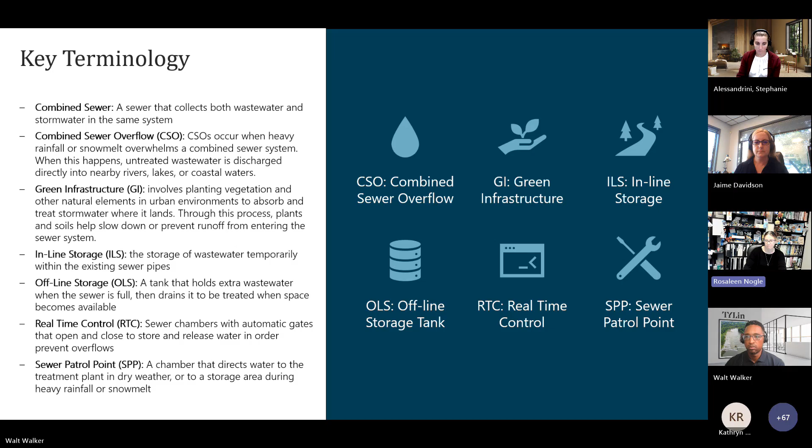We are funding this $1 billion through a mix of federal and state funding administered through New York State EFC and DEC, particularly using grants, 0 to low interest loans. We are funding the green infrastructure, the first round at least, through an environmental impact bond. And then we are also relying on our existing capital budget.

And so we will be funding through these mechanisms ongoing and future work at our treatment facility, offline storage, real-time control, green infrastructure, and then also pump station and other upgrades.

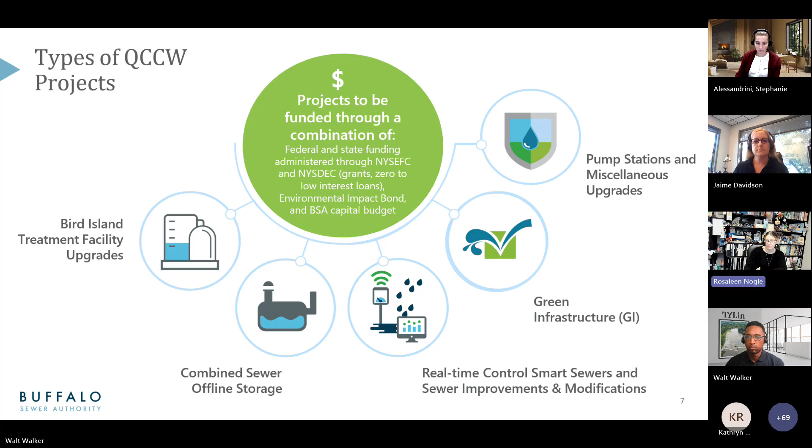We occasionally do get phone calls from folks asking about where can they find out what's upcoming. And you all are on this meeting to learn about what's all upcoming. So please go to buffalosewer.org. How can we help? Consultant, contractor, supplier opportunities is the best place to see what's upcoming and get real updates on where things are at and what is going out to bid or what we are soliciting proposals and qualifications for.

And on there, we have added a spreadsheet of forecast upcoming bids, RFPs, and RFQs. If you see that there's especially an RFQ or RFP that has not yet been posted, but seems to be that it should be out, please go ahead and reach out regarding that. But we are trying to keep this up to date so that everyone knows where things are at and what to be on the lookout for.

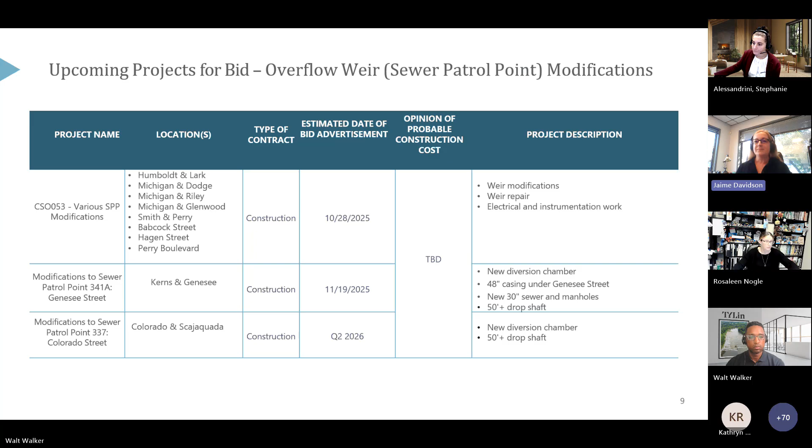Next slide. Okay, to start with the various SPP modifications, the very first site that is included is SPP 336B, and this is located within Humboldt Parkway, so that will be a challenge just working in that busy roadway. But this project includes a weir modification, basically adding a labyrinth weir as shown on the right in that detail to the existing SPP structure. This entire contract is coming out to bid at the end of October, and we are targeting an opening date before Thanksgiving on November 20th.

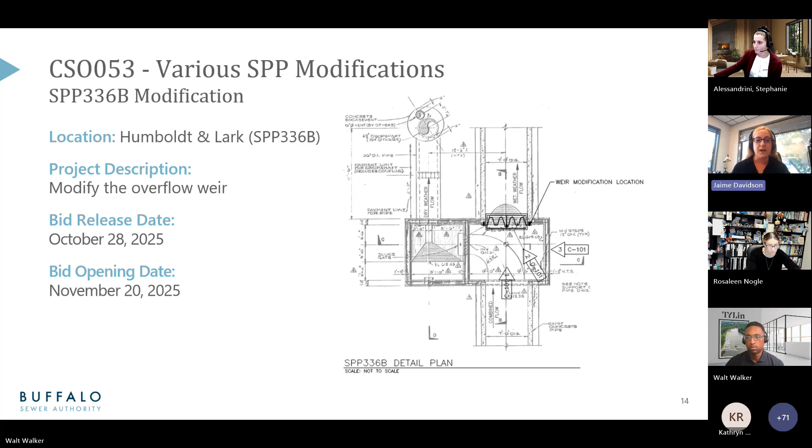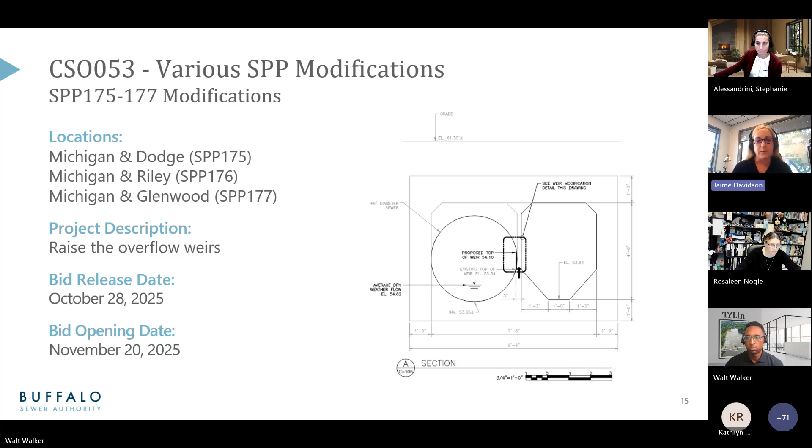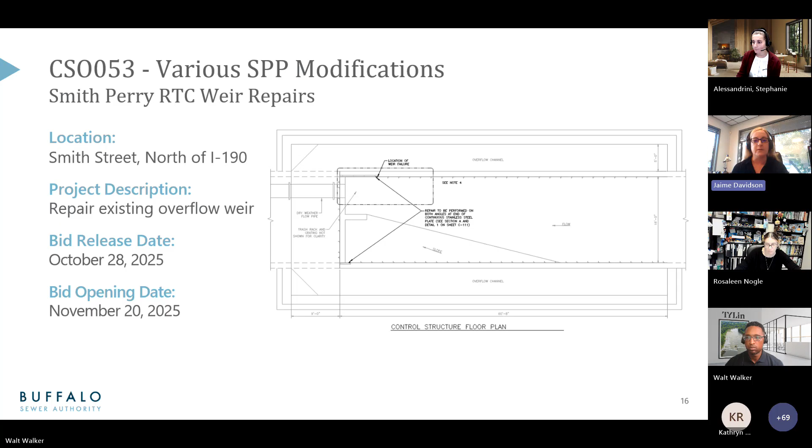The second grouping of projects in this contract will be 3 SPP weir raisings. They are all located on Michigan Avenue at subsequent side streets, so at Dodge, Riley, and Glenwood. And these ones include adding a weir, essentially a weir plate to raise the height of that weir, as shown in the detail. Also included in this contract is a repair to an existing RTC structure that is in place at Smith Street, right north of the 190 near Perry. The existing overflow weir was compromised recently, and a repair needs to be made to that. So that has been included in this contract as well.

And then finally, 3 sites have also been included in this contract that include various electrical and instrumentation upgrades that will help communicate with BSA's global control system for the real-time control structures. So that is the final 3 sites included in this whole construction contract.

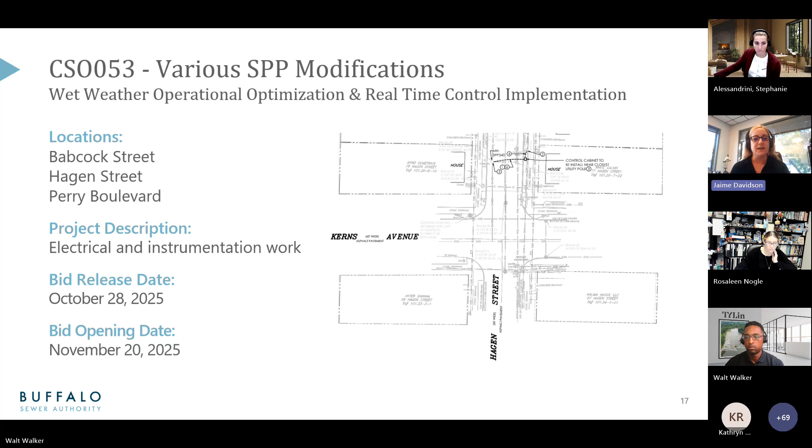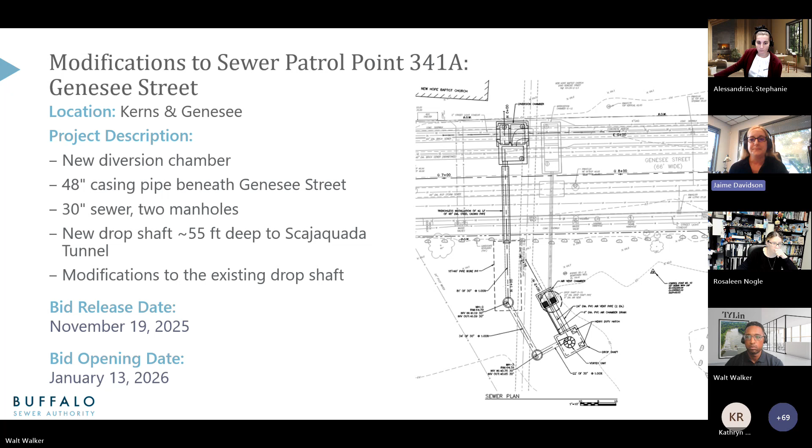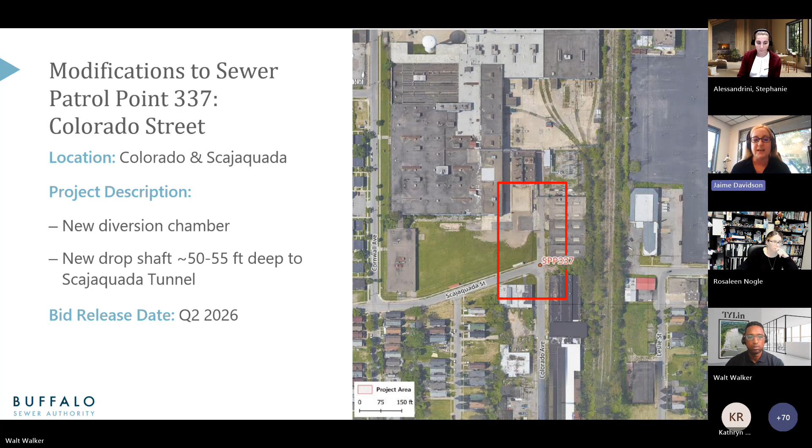And then right behind that will be the Colorado Street project. Colorado Street will be very similar to Genesee. It will also include a new diversion chamber and a new drop shaft that is approximately 50 feet down to the Scajaquada Tunnel, and that will also include a vortex structure. This one is closely behind, and we are targeting this one to come out for bid in the April to June range of 2026. And with that, I will pass it off to Walt.

Thank you, Jamie. All right, so continuing on the next round of projects coming up for bid advertisement, these will comprise facility-based projects, either projects specifically within the fence at the Bird Island wastewater treatment facility, or some of the collection system pumping stations also managed by the facilities team. And then I'll turn it over to Stephanie to talk about green infrastructure.

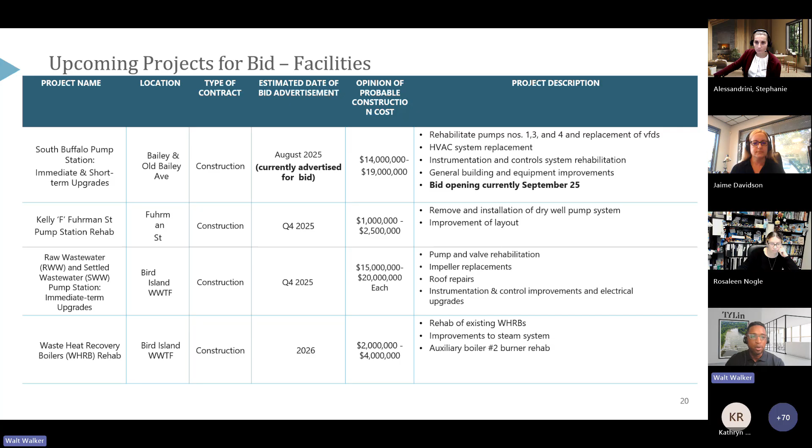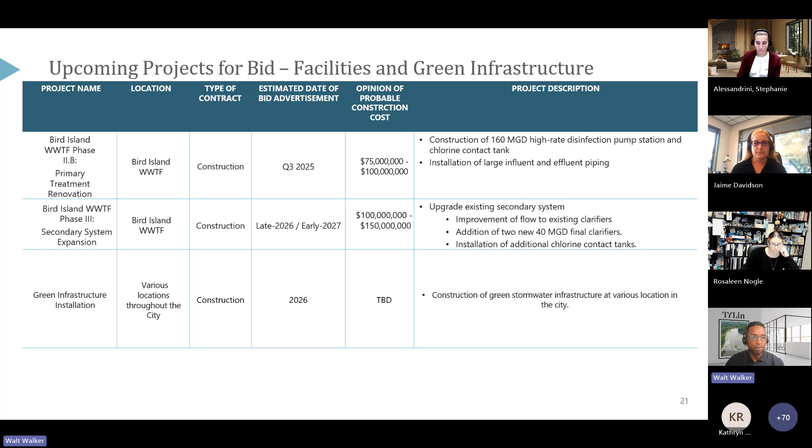So first we'll get into some of the collection system pump stations, and then the Bird Island facility projects listed here with South Buffalo Pump Station, Kelly F Pump Station Rehab, phase one of the raw wastewater and settled wastewater pump station upgrades. In 2026, the waste heat recovery boilers rehabilitation, phase 2B and 3 of Bird Island capital projects upgrades, and then wrapping that up with green infrastructure.

So with the South Buffalo Pump Station, this project is currently out for bid advertisement. It's one of the larger pump stations in Buffalo Sewer's collection system, and this project will focus on general pump rehabilitation, HVAC system replacement, various mechanical upgrades, structural and architectural rehabilitation, and some electrical and instrumentation improvements. So the current bid opening date is scheduled for September 25th, next week.

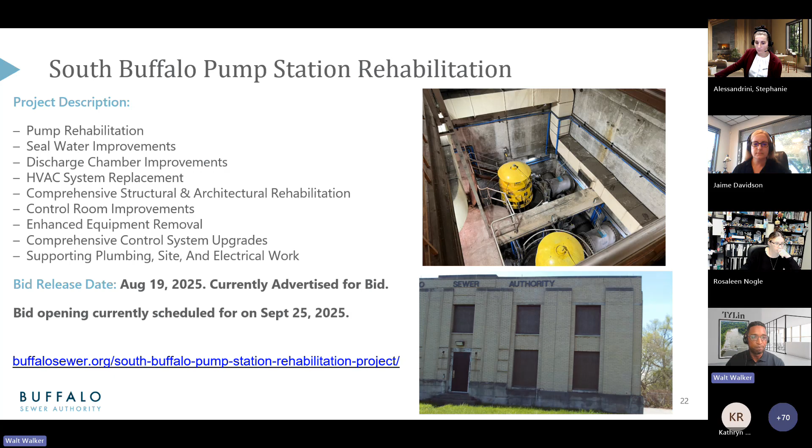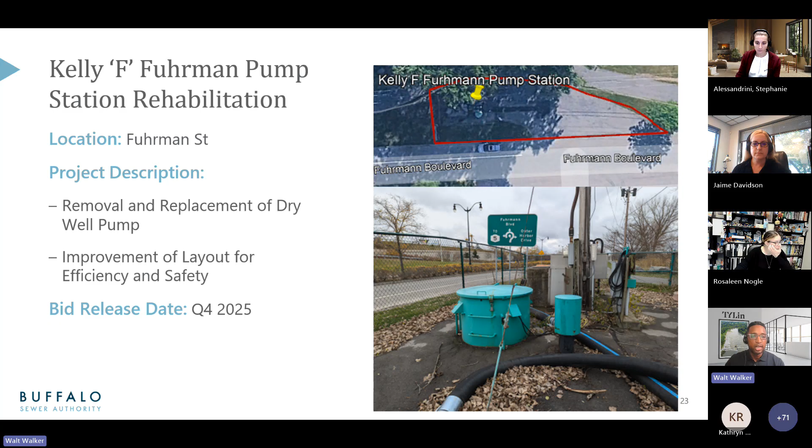I do know that there is an addendum likely coming through, one final addendum. So for those that are interested in submitting a bid for this project and want to get caught up in exploring if there is an opportunity to put in a bid, you can check out the standalone project page on the Buffalo Sewer website. The Kelly F Pump Station rehabilitation. This was a project designed by the Wendell team, comprised of removal and replacement of a dry well pump, improvement of layout for efficiency and safety, with a targeted release date of the final quarter of 2025.

Moving on to the raw wastewater and settled wastewater pump stations at Bird Island. The raw wastewater pumps are essentially the main sewage pumps at Bird Island. They began operations in the 1930s. There are 6 pumps with a collective capacity of 560 MGD, and their primary function is to pump incoming raw wastewater to the primary treatment system. The settled wastewater pump stations, equally important, pumping the treated primary effluent to the secondary treatment system.

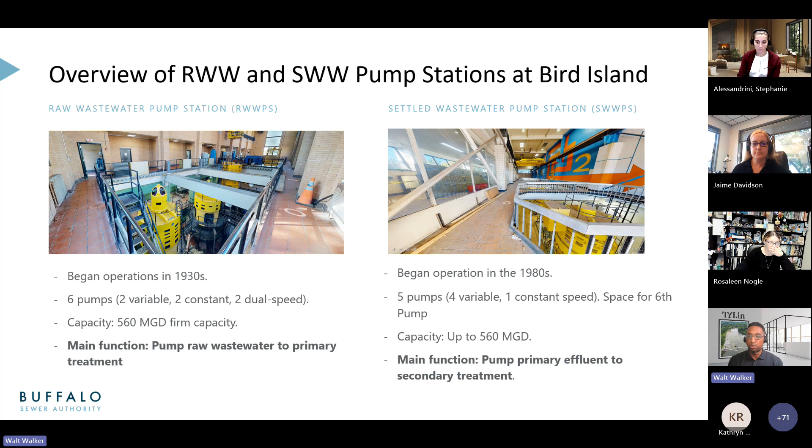So conditions assessments were performed over the course of 2024. The findings were organized into immediate, short-term, midterm, and long-term improvements. And so this upcoming procurement is going to be focusing on the immediate term upgrades for the raw wastewater pump station, rehabilitation of pumps, impellers, and motors, rehab and replacement of the roof, and installation of updated electrical and instrumentation and control systems.

And at the settled wastewater pump station, rehabilitation of the pumps and ancillary equipment, repairs to the roof, improvements of the heating, ventilation, and air conditioning for safety and operational efficiency, getting that into compliance with NFPA standards, and then similarly installation of updated electrical and control systems.

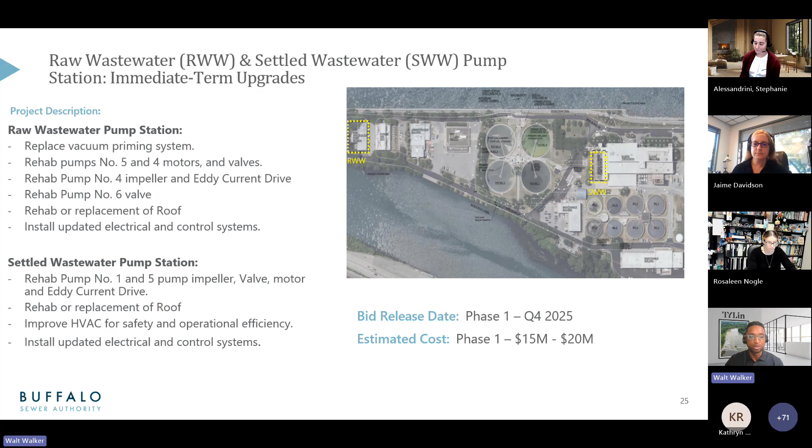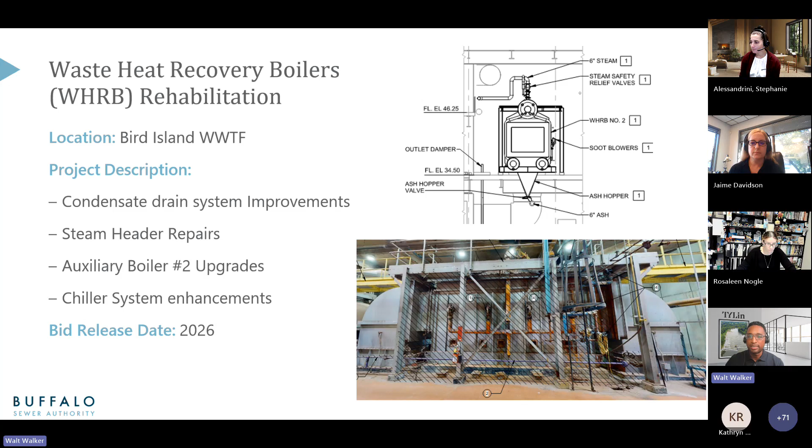Next, going on to what, for those that have been working with Buffalo Sewer for some time, they may call the NFA projects. These are these large capital projects, wet weather projects at Bird Island, which are part of the long-term control plan, now the Queen City Clean Waters initiative. So in the context of that, Buffalo Sewer has talked about these large capital projects in three phases. Phase 1, currently under construction, is rehabilitating Bird Island treatment plant's secondary systems to improve their aeration tanks.

Phase 2 is broken down into Part A and Part B. So phase 2A, which is focused on the primary treatment tanks renovation and odor control, along with Part B, phase 2B, will rehabilitate and upgrade the plant's physical treatment system to improve current flows. And for phase 2B, really focus on providing a new disinfection pump station and a chlorine contact tank to enhance partial treatment during wet weather that goes through outfall 001.

So phase 2A, focusing on the primary tanks, is currently under construction. Phase 2B, focusing on the new facilities, the high rate disinfection pump station and chlorine contact tank, along with the influent and effluent piping, along with the needed structural repairs to outfall 001, which the effluent piping will connect to. We focused on this upcoming bid advertisement to be released sometime in Q3 of this year.

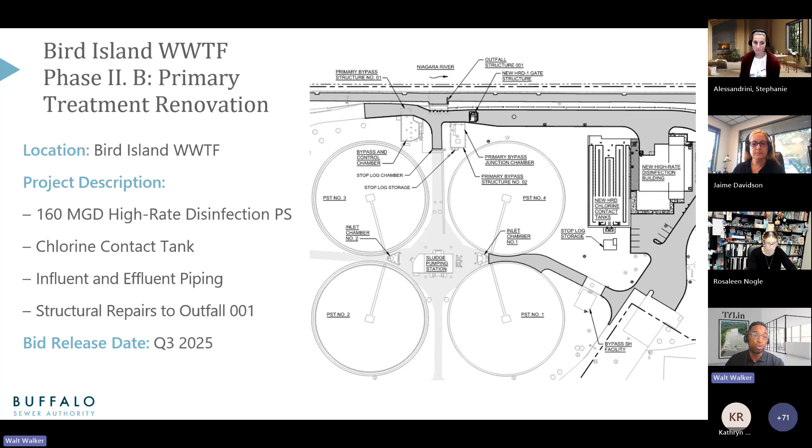Next, phase 3, currently in design, being led by AECOM, will further expand Bird Island's biological treatment system to handle more flow during wet weather. This project is comprised of improving flow to the existing 16 final clarifiers, the addition of 2 new 40 MGD final clarifiers, as well as the installation of a 5th chlorine contact tank alongside the 4 existing contact tanks. Bid advertisement is currently slated for late 2026, early 2027.

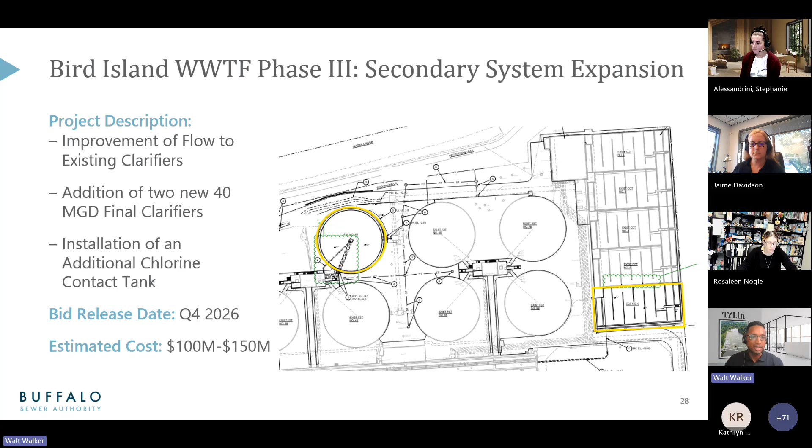So that gets us through the planned facility projects targeted for bid advertisement in the next 12 to 18 months. At this point, I'll turn it over to Stephanie to talk about green infrastructure and Rain Check 2.0.

Thanks, Walt. For those of you who don't know me, I'm Stephanie Alessandrini with Stantec. We're working with Rosie and Buffalo Sewer Authority on the Rain Check 2.0 program. This program is one of the cornerstones of Buffalo's green infrastructure plan. It includes 14 different distinct green infrastructure construction packages that will be released throughout 2026. These packages represent a significant investment in sustainable stormwater management and community resilience.

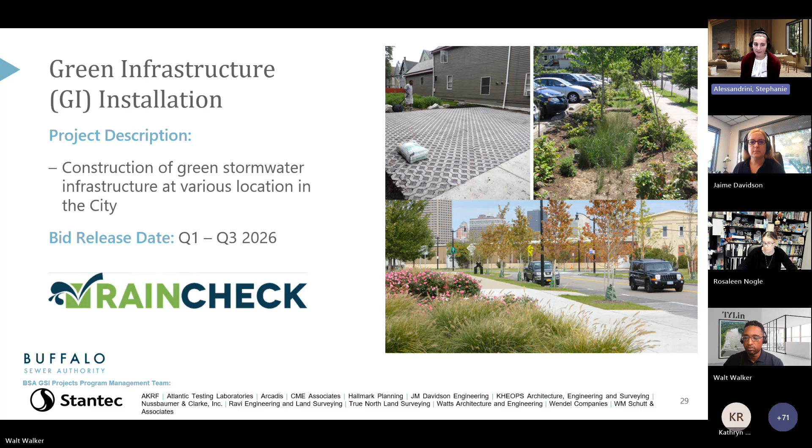To provide a little additional context, Buffalo Sewer Authority launched the Rain Check program in 2015 as part of their long-term control plan to reduce combined sewer overflows and improve water quality. Their primary goal is to manage nearly 570 acres of impervious area by 2034, which is a significant undertaking. Rain Check 1.0 was the first phase of the program, focused primarily on installing green infrastructure practices on public streets, parking areas, and private properties. Rain Check 2.0 expands on that through public partnerships with Buffalo Public Schools, the Buffalo Municipal Housing Authority, Buffalo Parks, and also work within public streets.

There are 6 priority combined sewer basins that were identified, located primarily within Buffalo's east side, downtown, and the South Buffalo neighborhoods. These areas encompass nearly 25% of the city's land and about 50% of its population. They were selected for their potential to deliver the greatest impact on water quality and public health.

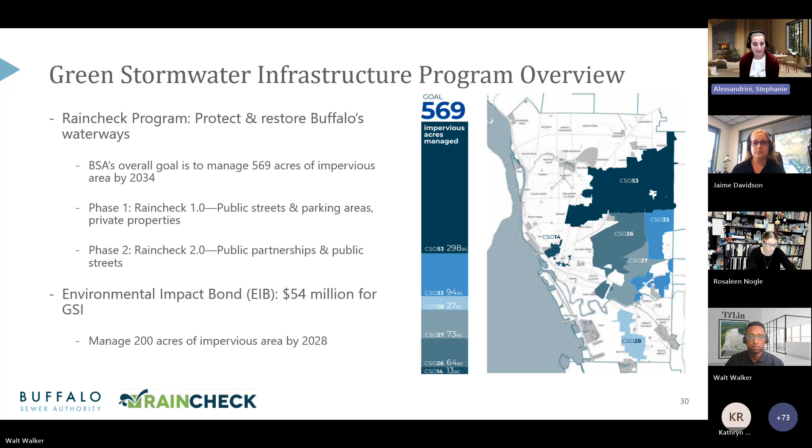In June 2021, BSA secured a $54 million environmental impact bond to install green infrastructure practices within these basins. The key condition of the environmental impact bond is that over 200 acres of impervious area need to be managed with green infrastructure practices by 2028. This funding, supplemented with grant awards from the Environmental Facilities Corporation, will provide the majority of the financing for construction of these improvements.

Next slide, please. A little bit of a timeline on how we got here. In 2004 to 2014, BSA developed and received approval for the long-term control plan. Rain Check 2.0 was officially kicked off in 2019, and the EIB was awarded in 2021.

In early 2024, we began the planning phase, which consisted of a desktop review with GIS software. Through that process, we identified 550 green infrastructure practices throughout those 6 priority basins. These were organized into 14 design packages, which were distributed to 4 consulting firms. The packages are currently in varying stages of completeness, ranging from the site investigatory phase to surpassing the 90% design milestone. The SEQR review is expected to wrap up later this month.

Per the EIB funding requirements, all of the GI work must be completed by the middle of June 2028. Next slide, please. On this slide, you'll notice the limits of the 14 different design packages. The right-of-way packages are outlined in dashed blue, and throughout there we have the 3 parks packages. These range in size from 1 park to 4 different parks, with smaller practices scattered across the priority basins. We tried, when locating these practices, to keep them as close together as possible.

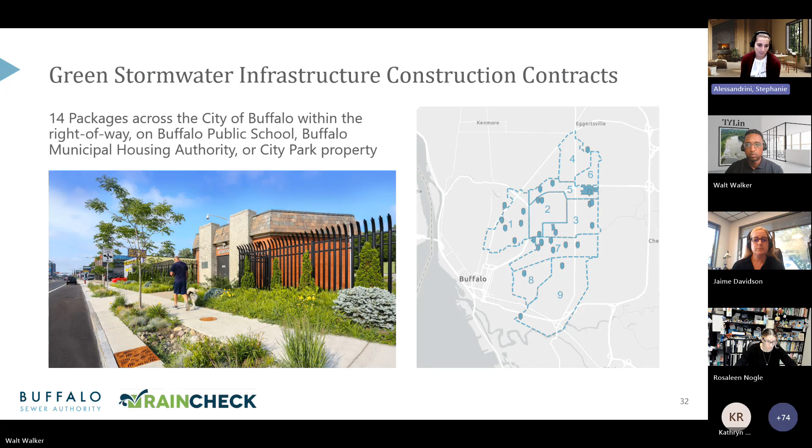The Buffalo Municipal Housing Authority package will include improvements at Ferry Grider and Kenfield Langfield, and the Buffalo Schools packages include improvements on and adjacent to approximately 19 Buffalo Public Schools or Buffalo Public School property. Next slide, please.

The number and type of green infrastructure improvements vary based on the package. On average, each right-of-way package will include about 40 to 60 different practices, smaller localized practices varying in size. The parks packages will be a bit larger, with 1 large practice located at Hennepin Park, and with the other 4 parks, smaller practices located adjacent to the parks and around their right-of-way. The proposed practices include things like rain gardens, underground storage systems, stormwater tree trenches, porous asphalt, infiltration trenches, pavement removal, and stormwater planters.

With the designs expected to wrap up in the winter of 2025, and varying stages of completion through 2026, we'll get ready to release those packages for bid throughout 2026. The average estimated construction costs vary between $1 million and about $15 million, and we have those ranges included on the slides there.

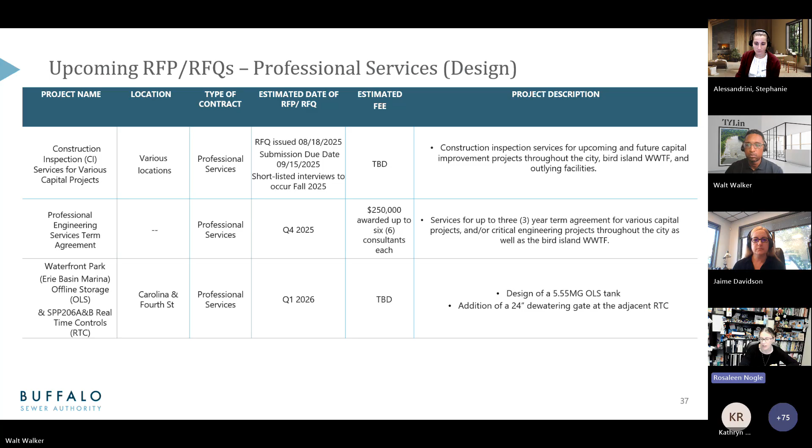An RFQ was issued on August 18th. Submissions were due yesterday, with interviews to follow in the next couple of weeks for construction inspection services. There was a whole list of things there. This RFQ is for construction inspection services, looking for the next 3 years, up to 5. This is specific to those projects being managed through the program management contract, but it could be used for other things. There will continue to be a mix of ways we contract for construction inspection services depending on the specific contract, but this is the first thing.

We will also be putting together our term agreement. We usually do 6 of these contracts. Generally, we award each of those contracts $250,000. These are for basically on-call services for engineering, smaller projects that we need to get moving on and require smaller tasks as needed. So we will pull proposals for use of that $250,000, depending on what we feel each firm is best qualified for, based on their qualification submittals.

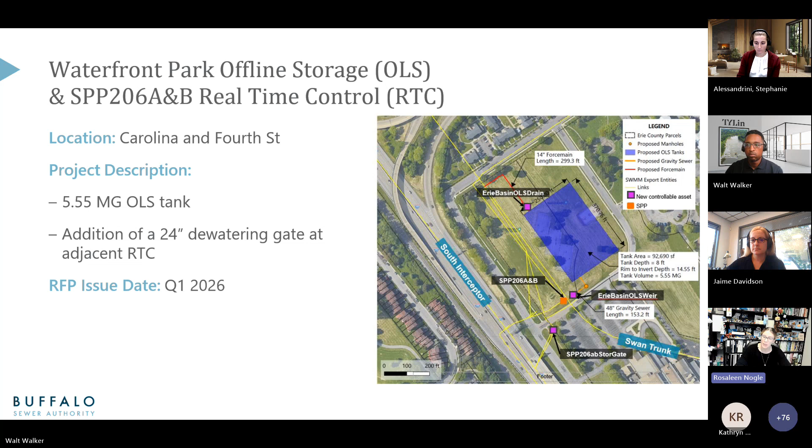So we have a large number of different professional and construction services required. Many of our projects are being funded through state entities, and they will have DBE and/or MWBE requirements. So whether it's construction or professional services, it is expected that we will have a prime and that we will have subs, and that those subs have various specializations.

On the state level, they are also implementing SDVOB goals as well. So there is a lot of opportunity for the inclusion of local, different suppliers and workforce members, and partnership with various smaller firms. Buffalo Sewer also has our own goals when we are self-funding. So building those relationships and building those partnerships is highly encouraged to ensure that everyone has a seat at the table, and we're all getting the best for the city of Buffalo at the end of the day.

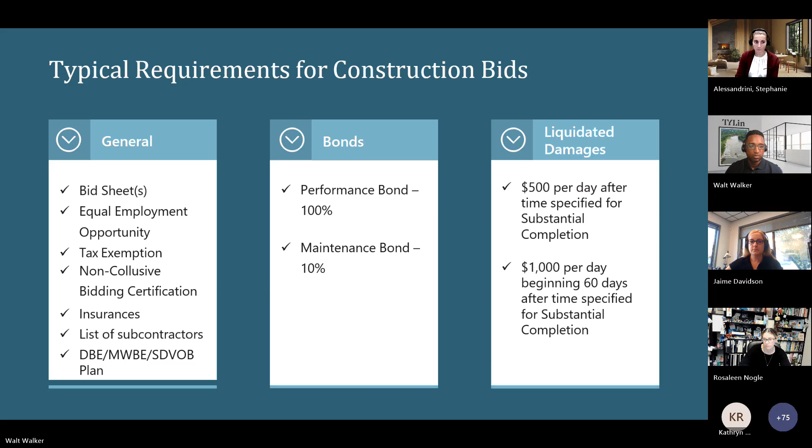I want to continue the discussion of inclusion, meaningful inclusion of small local business partners, particularly historically underrepresented firms. The why: there's millions of dollars of projects planned to occur over the next decade, and there's a real need to build capacity and availability of contractors, not just in Buffalo, but in Western New York.

So this is an opportunity for long-standing firms to promote meaningful teaming arrangements, mentorships, partnerships between those established, experienced firms and new or smaller firms, with a bonus for those based in Western New York. But it's really about creating economic opportunity for everyone, including disadvantaged minority women business enterprises and service-disabled veteran-owned businesses.

Buffalo Sewer is not just looking for firms on the professional services side or the contracting side to just check the box, but demonstration of meaningful involvement for these local and smaller firms to grow and to be positioned to do more great work. So some background for those not familiar with the typical standards.

Rosie touched on that a bit earlier, but whether you're a DBE or MWBE, you must be certified in New York State. The requirement is also based on the funding source, whether a project is funded through EFC, DEC, or within Buffalo Sewer's capital budget.